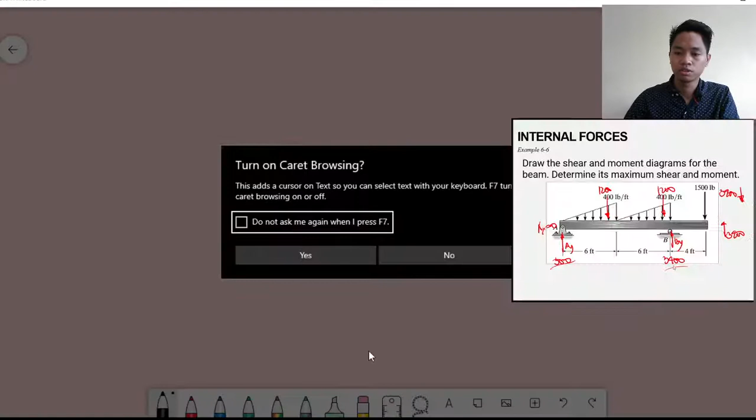Again, you can solve the reaction there so we can proceed to our shear and moment diagrams. Okay, so let's go here. So let's start with your load diagram. Let's always start with that - that should be your load diagram. So for your load diagram, we just need to

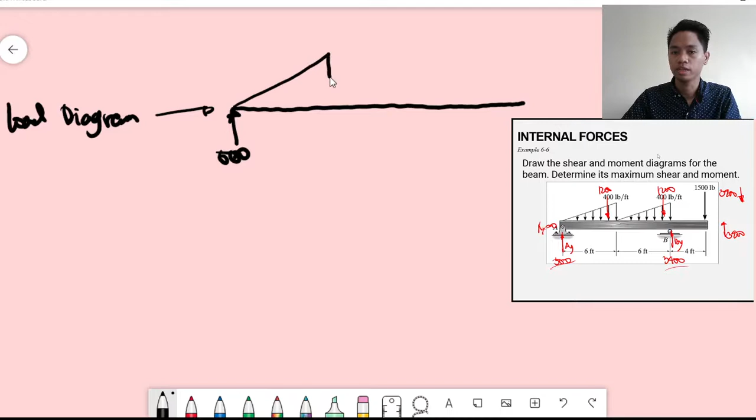state your forces acting. So let's identify the dimensions. We have your AY upward, that is 500, right. Then we have your triangular loading here with an intensity of 400 pounds per foot.

So the same, that should be the same length, 400 pounds per foot. Then after that, going up, 3,400. Okay, you start with the load diagram, then lastly it's drawn a bit extra to scale, then lastly there's a downward force of 1,500.

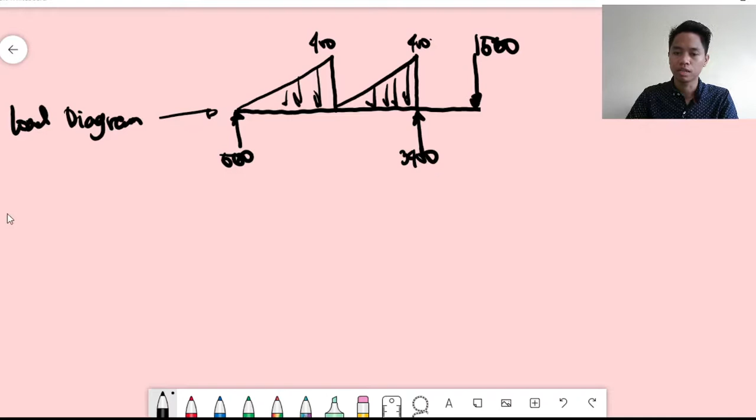Then after that, we need to solve and draw your shear diagram.

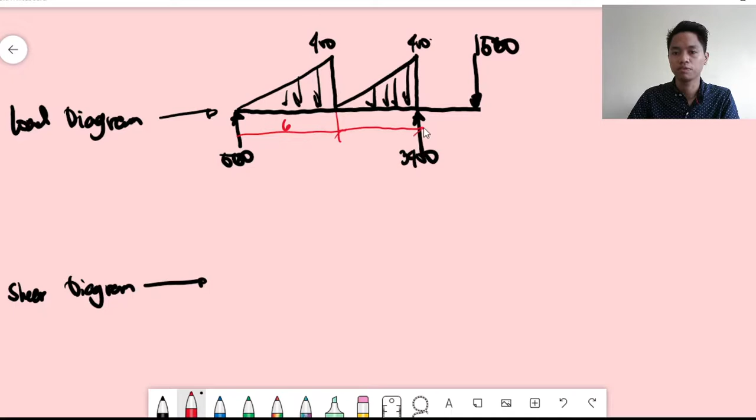So again, here's the technique to remember for drawing your shear moment diagram - there are only two things you need to remember. First, you know how to solve different areas.

You know the areas of different shapes, whatever shapes - parabolic, cubic. We already discussed before the different types of areas - triangle, rectangle, trapezoid.

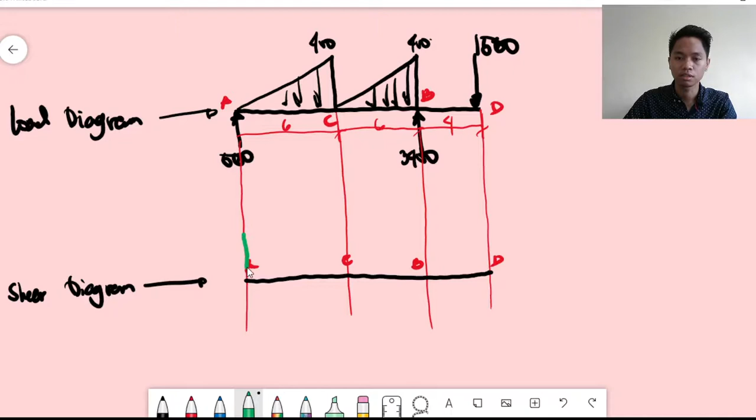So all upward forces are automatically placed on top. So at point A we have 500. That should be positive 500.

After that, since the change from A to C is gradual, you cannot go directly from A to B - there's no sudden change at point C, right?

So for the change to be gradual, you need to solve it segment by segment, from A to C, since that is where your distributed load is.

So we start with segment point C. Therefore, the shear at C is equal to the area of the loading from A to C plus the shear at A - that is our rule.

So therefore we need to solve the area of the loading diagram from A to C, then add the original shear at A.

This would be the change in shear, based on our definition - this is the delta shear.

So to solve the area is very simple - that is 1/2 of the base times height. The area is equal to 1/2 of the base, which is 6, times negative 400.

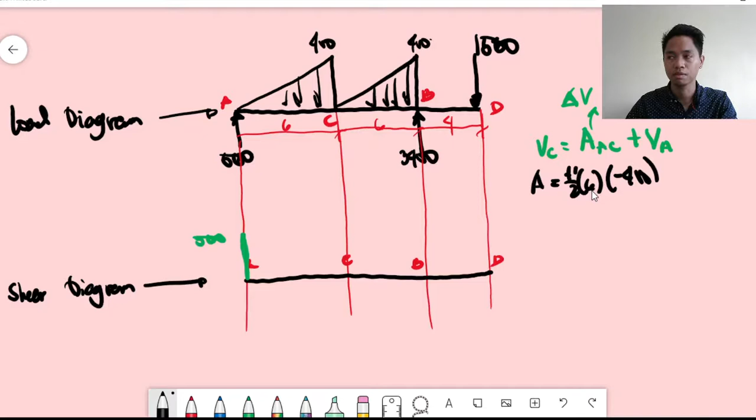So 1/2 of 6 is 3. 3 times negative 400 equals negative 1200. So therefore the area is negative 1200.

Plus the shear at A. What is the shear at A? That is 500. So negative 1200 plus 500 equals negative 700.

So it goes somewhere there - let me continue it. This should be negative 700.

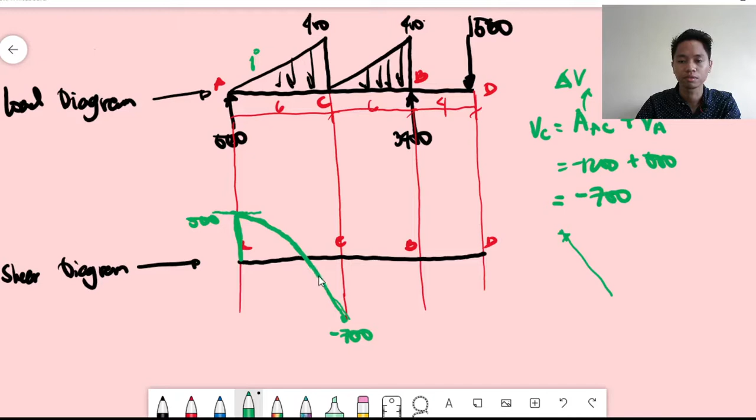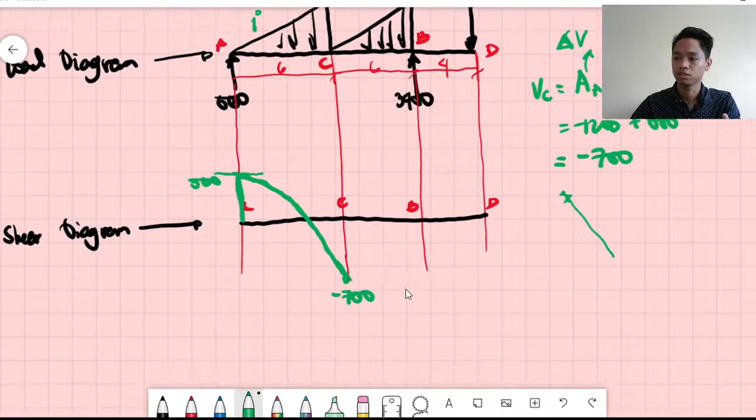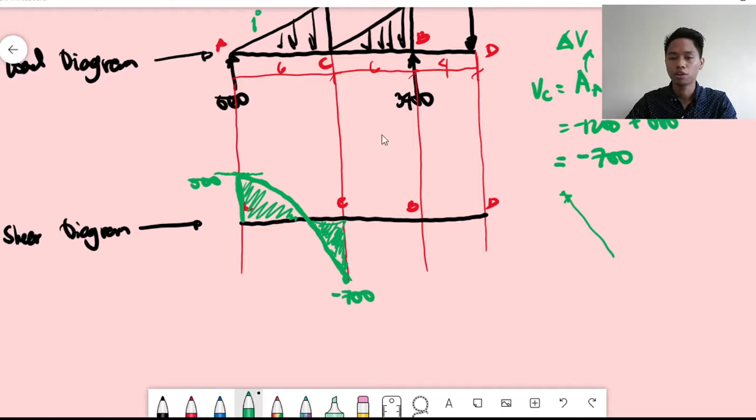So that's the shape of your load diagram, shear diagram. This is your shear diagram at this point—that's from segment A to C. So now, what is the shear at B?

What is the shear at B? Same as before, the shear at B is equal to the area—the area from C to B plus the shear at C. So what is the area from C to B? This is a different triangle, right?

A different triangle, this triangle here. Now what is the area of this? Same as before, the area is negative 1,200. So therefore that should be negative 1,200 plus the shear at C. The shear at C is negative 700.

So therefore, what is the shear at B? That is equal to negative 1,900. So it's somewhere there. If we project it down, that should be negative 1,900.

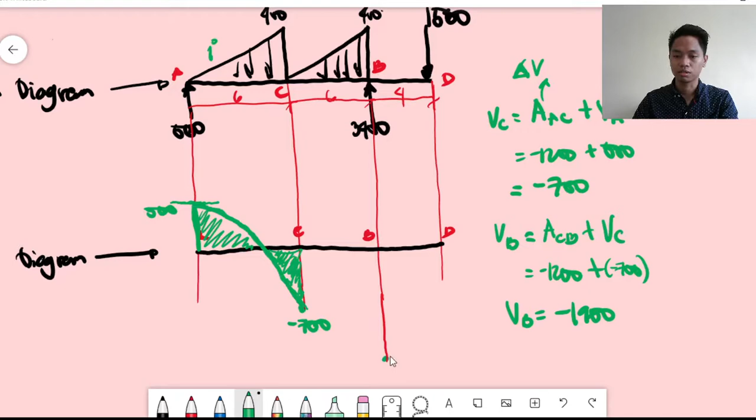So, same thing. Sir, how do we connect this? Same thing - the intensity at C should be the slope of your shear diagram. So you don't consider the negative 400. Okay, that segment is done, that's segment A to C.

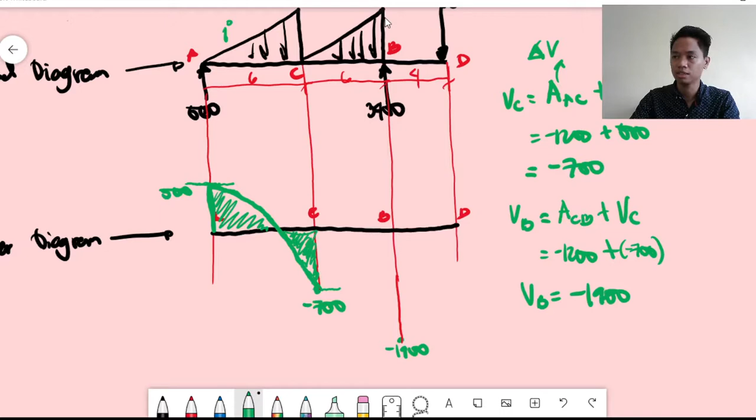Now let's move to the next segment, C to B. What is the intensity at point C of the second segment? Isn't it zero again? So therefore it's zero, horizontal. Then here, what is the intensity - that's negative 400, right? That's negative 400 again, so somewhere it continues there.

It's not very steep, but negative, meaning leaning to the left. So, tangent there, then tangent here. So it forms that shape - not quite a parabola, but just to emphasize the parabola shape. So that is your shear diagram from point C to B, somewhere like that, okay?

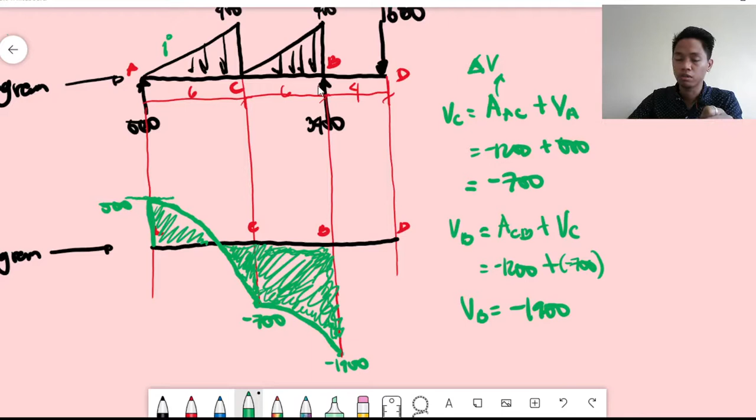So, therefore, what is the shear at B? Since we have 3,400, automatically, negative 19 plus the shear here. The load here - negative 19 plus 3,400. Why plus 3,400? Because that is an upward force, so it's positive. So negative 19 plus 3,400, how much is that? Negative 19 plus 3,400 equals positive 15.

So somewhere there, that is positive 15. So we connect it - from 19, it rises straight up to 15. So it's an abrupt change, from negative 19 it becomes 1,500 - that's because of the reaction there. So it suddenly rises.

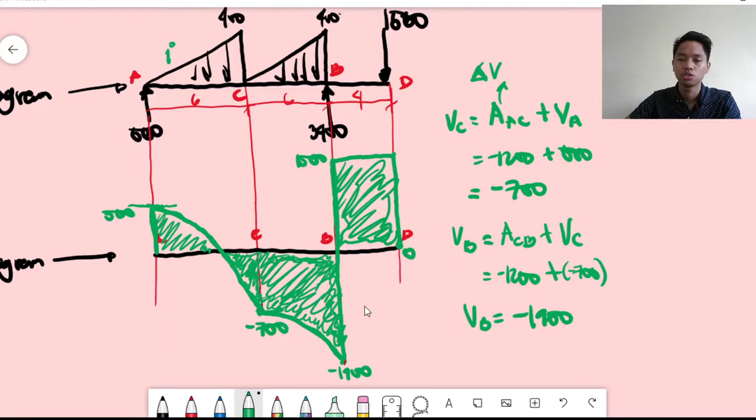Now we can solve what is your Vmax. Your maximum shear is equal to, obviously, negative 1,900 pounds. Okay, the color's wrong. Let me fix that. Okay, that is negative 19.

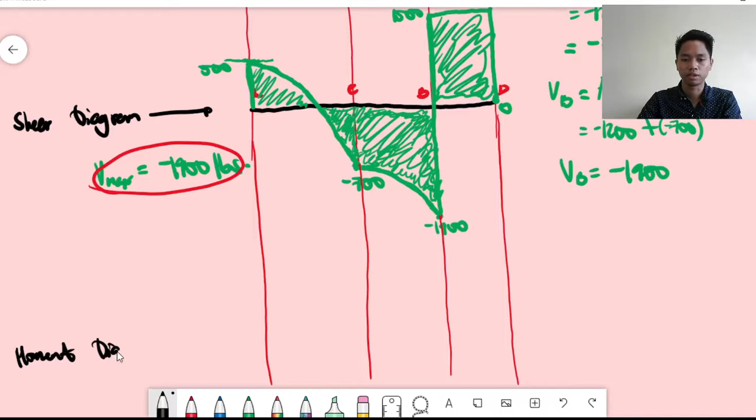So now, let's do the moment diagram. Moment diagram. So let's just project it. Okay, for solving your moment diagram. Let me draw this here. Okay, same as before - this should be our point A, our point C, our point B, and our point D.

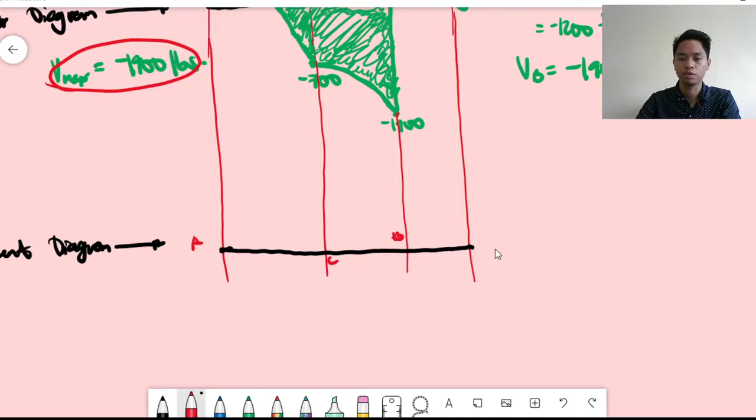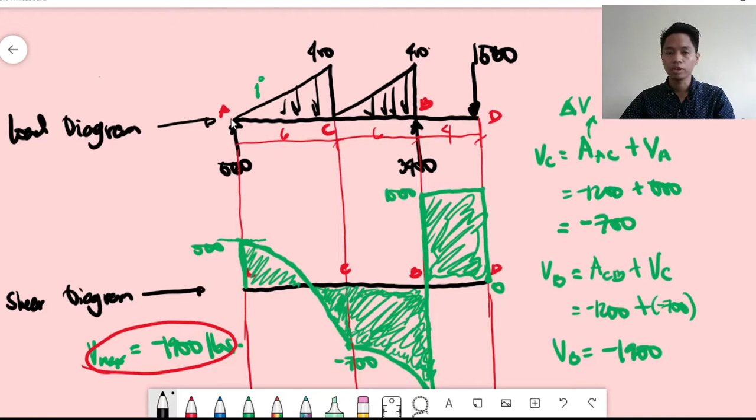Since we don't have any moments or couple moments in the load diagram, we don't have anything to reflect here. At point A, we don't have a moment or couple moment, right? So therefore, automatically, our first value here would be 0, since we have no moment or couple moment above. Alright? Then, what is the moment at C?

Okay, what is the moment at C? It won't go straight through, alright? It won't go straight because you have a sudden change in the shear diagram. When there's a change, you can't just go straight through - you need to account for it. So you need to segment it part by part, cutting at this part.

Let's call this point E. So you can't go straight through at point C, because again, there's a sudden change at E. So first we need to solve the moment at point E.

Now, what is the value at point A? What is the distance at point E? We don't know this distance yet. Let's make this our X. But okay, how do we solve for X?

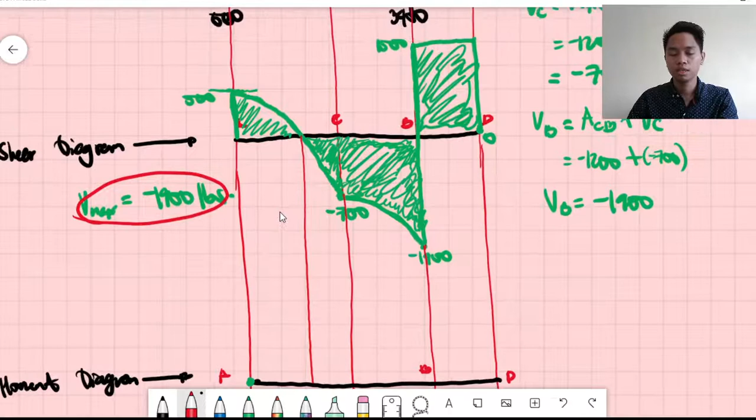So here's the idea - you know that at point E, the shear is equal to 0. You already know this because that's basic algebra - your x-intercept is where the value of y is 0.

So in this part, our y is actually the shear. So therefore, this would be our x-intercept, because our shear is 0 there. So what is the distance where zero shear occurs?

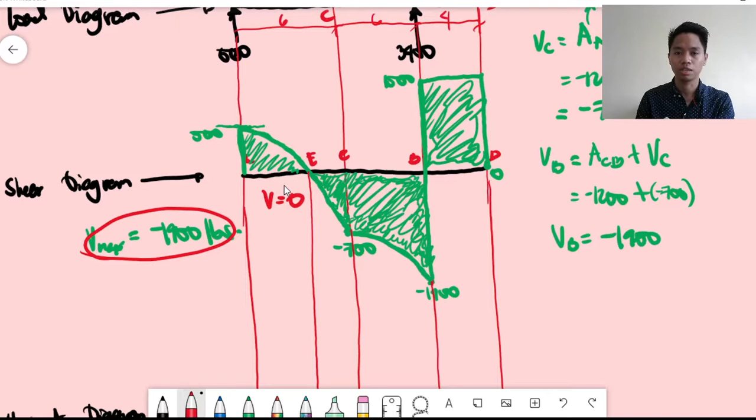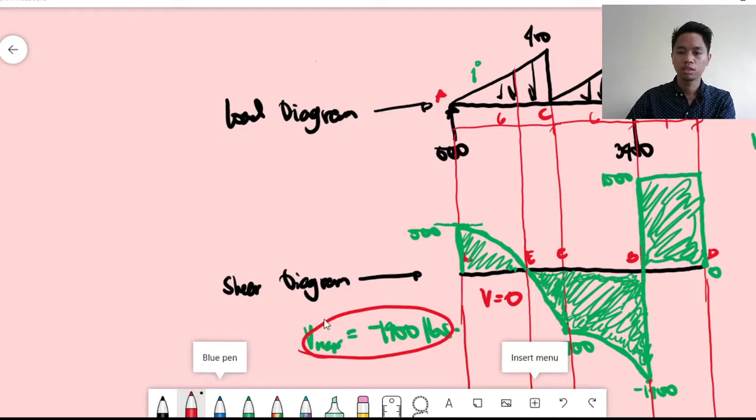Alright, so let's go back here. How do we get the distance x where zero shear occurs? Let's go back to our shear and moment diagram. Let's use this segment AE. Let's project it upward. This would be our point E.

Your shear at E is equal to the area - the area of your load diagram from A to E, plus the shear at A. That's our rule - the shear at E is simply the area of this load diagram, this rainbow-shaded part. So what is the area here? You need to add the shear at A to get the shear at E. That's basic, you'll master it along the way.

So what is the shear at E? This is equal to 0. You know it's 0, the shear at E. Now what is the area of AE? You know this is our x, so that's why we set it up this way.

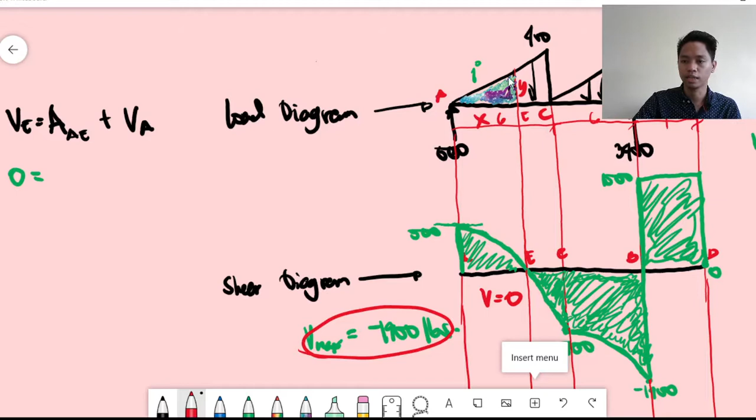So let's say this is our x and this is our y, the height. Let's express y in terms of x using ratio and proportion - this triangle over this triangle. Your x over y is equal to - the equivalent of x for the whole triangle is 6. It's ratio and proportion, 6. Then your y above is negative 400.

Negative 400 because that's a downward force. So therefore, what is the value of your y? Your y is equal to negative 400x over 6. So now we have the value of y.

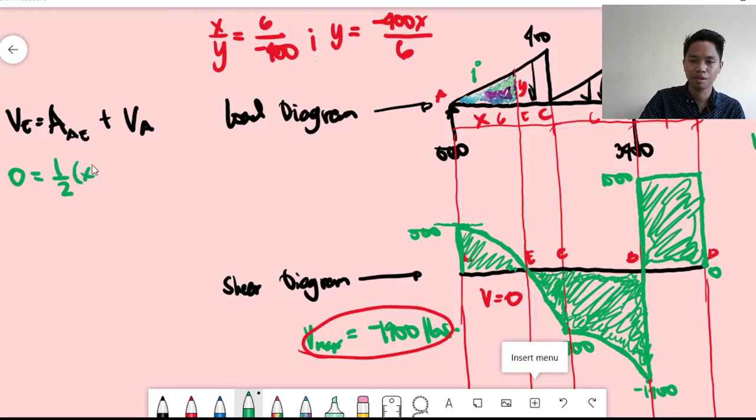Now, what is the area of this shaded region? The area here would be 1/2 of the base, which is x, times the height, which is y, that is negative 400x over 6. Plus, what is the shear at A? That is 500.

So therefore, this would be - let's calculate - negative 400 over 2 times 6, that is 12. So that is negative 100 over 3, x squared, plus 500.

So therefore, we can solve for x here. You can just use your calculator's mode 5, mode 5 3 - your mode 5 3, the coefficient of A is negative 100 divided by 3. B is 0, then our constant would be 500.

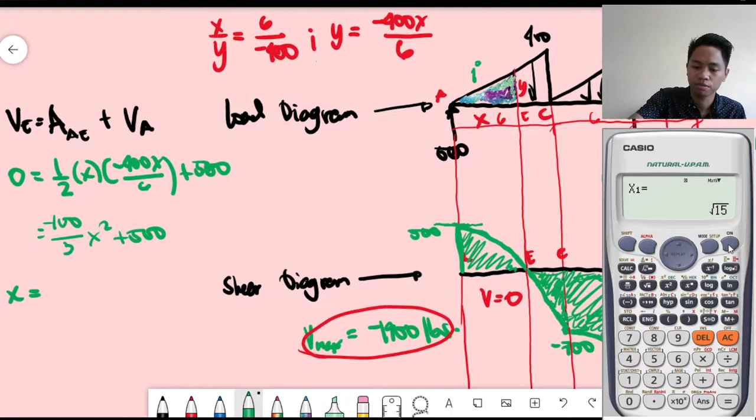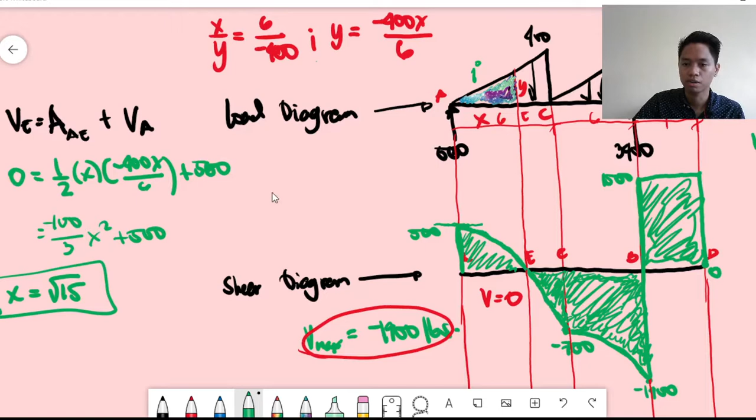Your x is square root of 15, and negative square root of 15. Obviously, we can't use negative square root of 15 because we don't have negative distance - it's a distance. So therefore, we have square root of 15 as our x. I hope you understood how we got x - it's square root of 15. Now, what is this remaining distance? This would be 6 minus square root of 15, obviously.

So, what is the value of x? Therefore, at square root of 15, what is the square root of 15? Mode 1, square root of 15, that is about 3. Yeah, 3.87. So from 3.8 feet, that's where your shear is 0.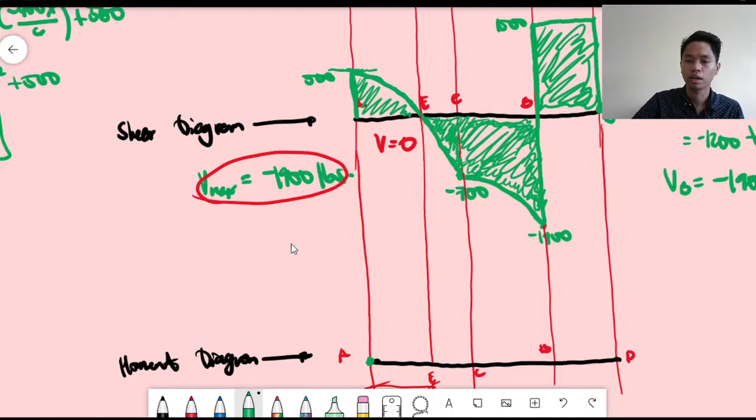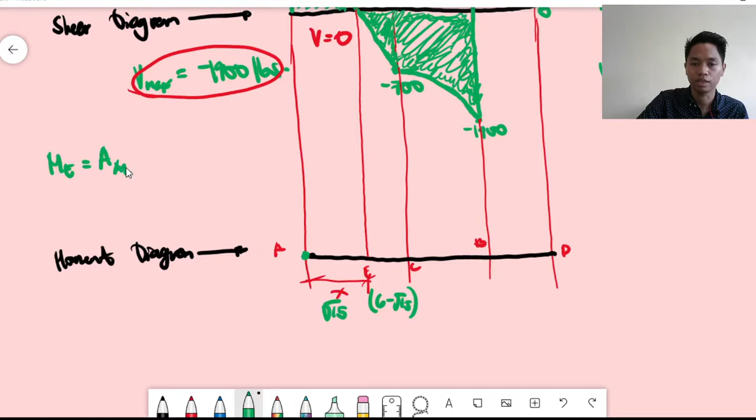So that is one important thing about the shear diagram. Okay, next, the moment at A, this is how we get the moment diagram. The moment at E is equal to the area of your shear diagram from A to E plus the moment at A.

Now, what is the area at A? This is the area, this area from A to E. So you need to master what the area is for different shapes or different sections. In this case, this is a parabolic segment, right?

Because we know this is to the second degree, so it's a parabolic segment. Now, what is the area of a parabolic segment? The area of a parabolic segment is 2/3 of base times height. I don't have to discuss that because it's a very common formula. It was derived using calculus.

So the area is 2/3 of base times height. In this case, what is the area of this shaded region above? That is equal to 2/3. The base is, what is this value? This is our base, that is equal to the square root of 15. The height, what is the height here? This is 500.

So therefore, what is our area? The area would be 2/3 of the base, which is square root of 15, and then the height would be 500. Our area would be 1,291 plus the moment at A, which is 0. So therefore, the moment at E is 1,291. So somewhere there, 1,291. Okay, so that's the moment at E.

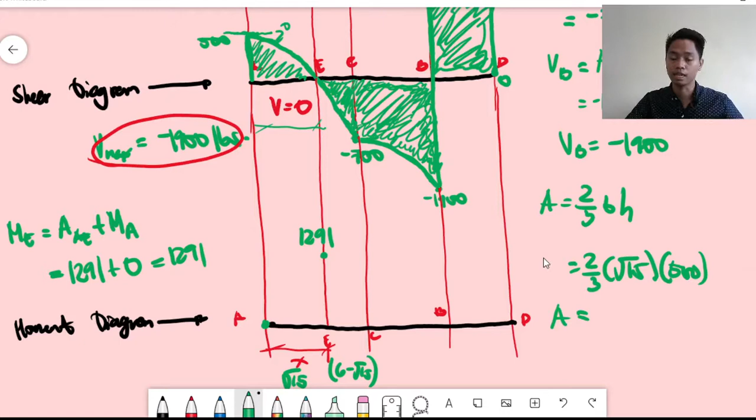Now the question is, where do I connect this? Very easy. Consider the intensity of the value of your shear, okay? The value of your shear, that would be the slope of your moment diagram. So what is the shear at A? The shear at A is positive 500, right?

That is positive 500, so that is leaning to the right. So somewhere there. What is the shear at E? That is 0, so therefore 0 slope. So tangent here, tangent at this point, that's how you connect it. So that's how you connect it.

So, one more thing to remember here. From point A, okay, consider segment AC. From A to C, E, which is in the middle of A and C, right? Point E is in the middle of A and C. Now, since E has 0 shear, if you compare the moment diagram from A to C, E will give you the maximum moment.

So that's one thing to remember, that wherever your 0 shear is, that's also where your maximum moment occurs. Not necessarily the maximum moment of the whole beam, but there's a probability that it's also the maximum, though not always. But in this case, if we consider segment AC, since it crosses the beam at the x-axis, that's where the 0 shear is. So if we compare from A to C, E has the biggest moment. It's the maximum moment in that part.

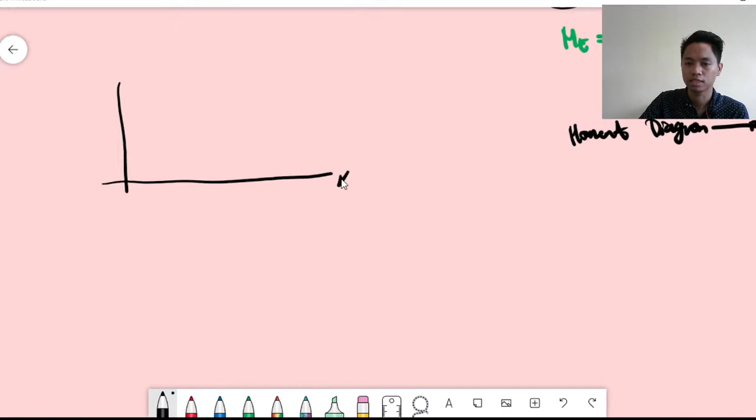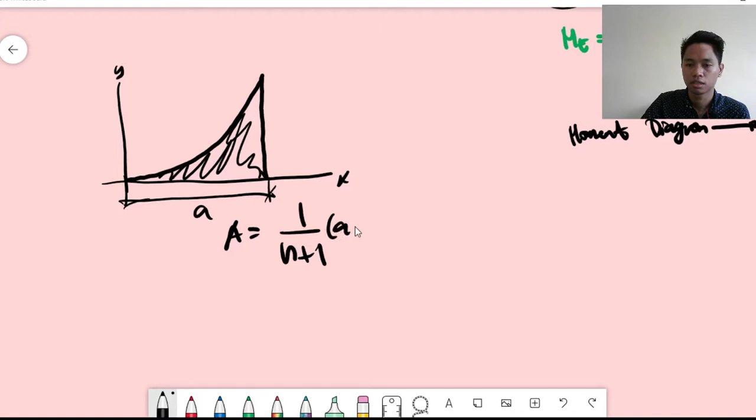So please be careful, you can't just use that formula. Why, sir? Because you can only use that formula if your vertex is at the origin. Or, to simplify, you can only use it if your slope at this point is 0. Meaning, if this is your x-axis, this is your y-axis, that formula derived for the spandrel, this is your spandrel, has an area equal to 1 over n plus 1, with this as your A, and this would be your h, or your height.

So this would be AH over n plus 1. So therefore, if you have a parabolic na spandrel, that should be 1/3 of AH, diba? Kay 2 plus 1 raman ta. Pero dili ito nimo siya pwede magamit sa ato problem dire.

Kay ang point E is not a zero slope. Okay, dili siya zero slope ko naman. If you are going to consider ang value nimo dire, dili ni siya zero because whatever the slope here is equivalent to the intensity here, di ba? That is the explanation.

Kung unsay slope nimo dire, that is equivalent to your intensity here. So therefore, sure ka nga dili gyud zero ang slope ani niya. So therefore, dili nimo pwede magamit ang kaninga formula kay your vertex nag-ana man ni ang graph sa atong problema. This is our point A, this is our point C. Dili niyo pwede magamit because again, dili ni siya zero slope.

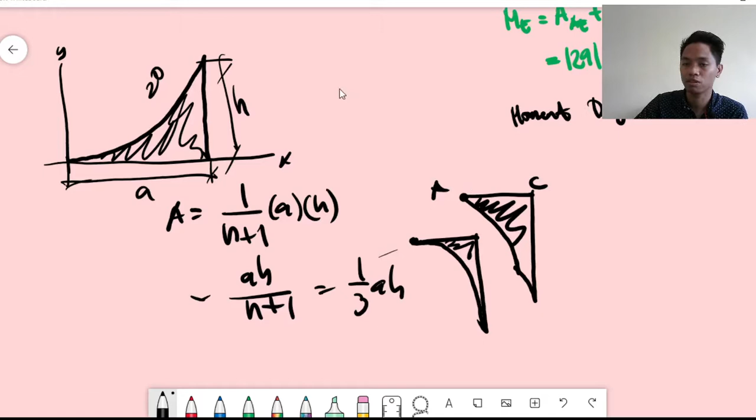Okay, dili siya zero slope. Unlike kung nakaana na siya, nakatangent siya diha, pwede niyo magamit si 1/3 AH, kay zero slope man siya diha. Pero dire, dili na zero slope. Kaya based sa imuhang figure kaganina, makabalo ka nga dili ni siya zero slope. Kaya again, dili man ni siya zero, kaninga point. So, whatever the value here, that should be the slope here.

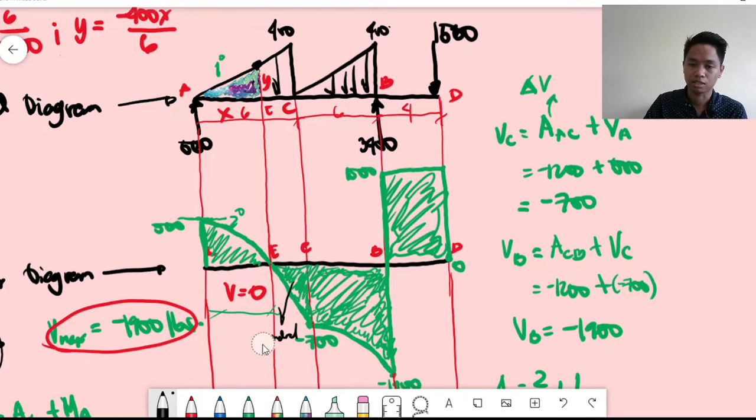So, therefore, dili niyo pwede magamit si spandrel in this case. So, unsa ko pag-solve si area at this problem, kay malangan man ka. Okay, nga rin na masulod ang imuhang diskarte. Diskarte lang na siya. So, maski unsa nga buhaton, diskarte lang gyud ka kung unsa nimo pag-solve si area. Okay, how to solve this area?

Di ba kabalo ani? Ang buhaton nato karon diri is, di ba kabalo man ta the area of this one? We know the area of this one.

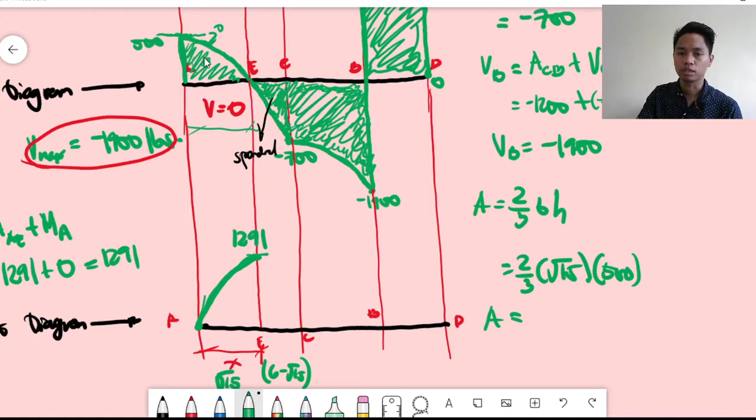We know the area of this one, kani siya. Di ba? So our problem here is, ano natin siya pag-solve kaning area kaning akong naay nakabutang nga spandrel. Pero we cannot use the formula katong 1/3 BH kay this is not sa vertex, wala siya sa origin. So we can just solve this area if...

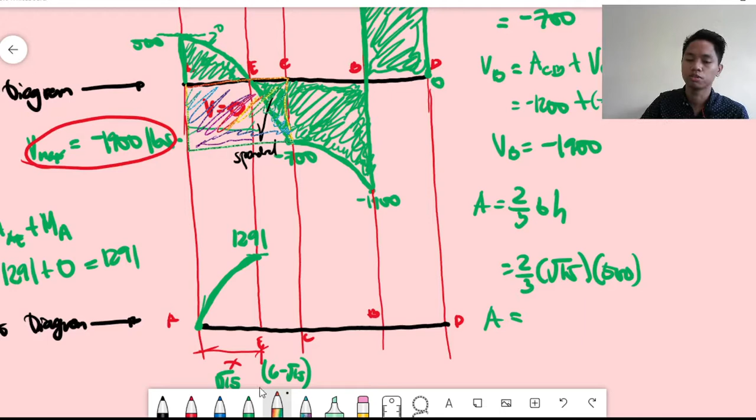Di ba pwede niya ito gamitin nga rectangle? So natay rectangle diri. 'Di ba if you are just going to observe lang. Kani nga area, say this is our A1. Tapos ang atong A2 would be ang rectangle.

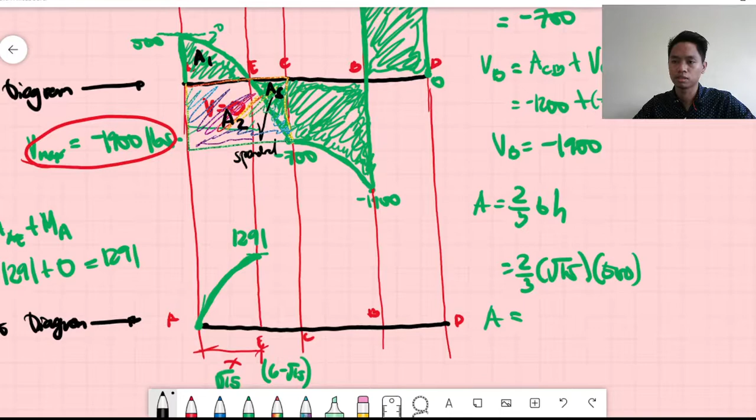So, the area, say this is our spandrel. Ato siya butang AS. The area of AS, siguro ako na siya i-delete kay para natay space. Your AS would be area 1 plus area 2. Okay, I hope mo nakagets.

Ang A1 nato is kani siya, kaning green. Ang atong A2 is kaning naka-rainbow. Minus. Unsay ako i-minus? Di ba I can solve this area of this parabolic nga segment? Kaya na nako siya i-solve ang parabolic segment gamit ang formula, the area is 2/3 BH. Mura na siya, kung giyon sa nako pag-solve si A1, naka-solve dara kaning si 1291, di ba? Kung giyon sa nako pag-solve si 1291, kani siya, kung giunsa nina ko siya pag-solve, that would just be the same.

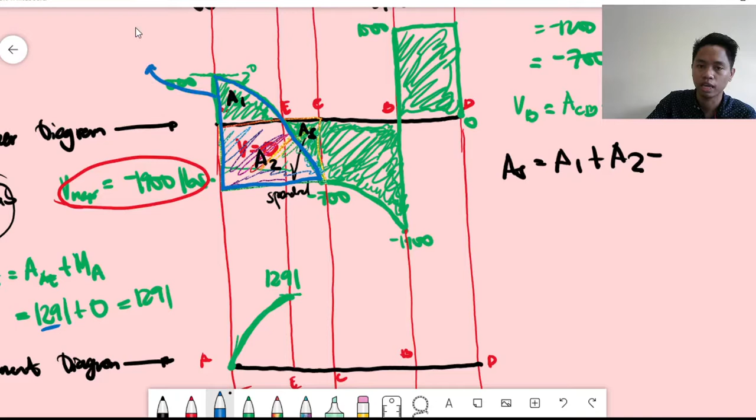Okay, say ang atong area sa dako would be your A parabola, AP. That should be A1 plus A2 minus area of your parabola. Kaning green plus kaning rectangle nga rainbow. Ako nitang tangon ang kaning parabola nga dako. Di ba ang mahabilin kay si AS?

So ang mo na i-discard ang imo lang jud puhunan. Ang imo lang jud puhunan diha is dapat swito jud ka sa mga different areas, mangita jud paagi nga makasolve ko sa areas. Ang imo lang jud diri is dapat makasolve kag area. Mura na problema nimo, so discarding na lang din na siya.

So AS would be what is the area of your A1? Na-solve na to, the area of the A1 is 1291. What is A2? How to solve A2? Di ba rectangle naman na siya? Rectangle that has width of 6, yeah. So this should be 6 multiplied by 700.

Sir, wala lagi nimo gamita ang negative. Wala ako na gamita because again, I'm just considering the value of your area. Wala man negative nga area. So again, ako na siya i-consider as area gyud, wala ako nag-consider sa sign. Just plain area because again, that's the problem natong solvehon karon.

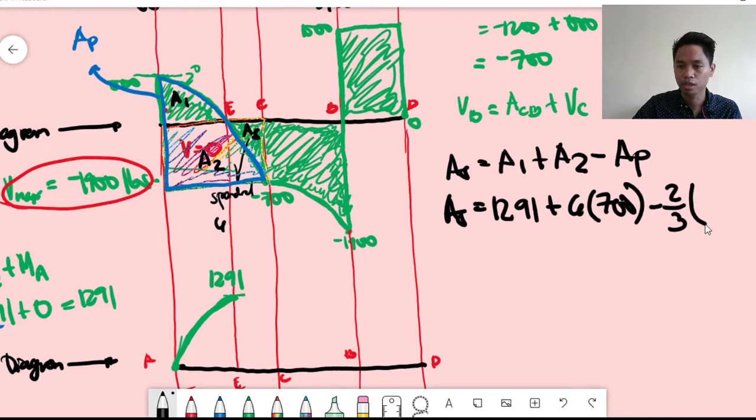Unsa ang pag-solve sa area AS? So 6 times 700, that is equal to your rectangle. So minus, okay, i-minus nako ang dako kaayo nga parabolic segment. That should be 2/3. What is the base of this parabolic segment? The base is 6. And the height is pila ni distance diri?

Gikan diri padung diri, that should be 500 plus 700. So pila na siya? 1,200. Therefore, what is the area of this very small nga spandrel? That is 1,291 plus 6 times 700, minus 2/3 of the base, which is 6. The height is 1,200. That is equal to 691. Okay? Therefore, the area here would be 691.

Alright, so dinhi ako ibutang si negative. Sir, ingat ka nang magbutang og negative. Sure man ko nga negative area ni siya, kay naa man siya sa ubos, di ba? Your AS is a negative area. Kaya naa siya sa ilalom sa x-axis. So, therefore, naa diri si negative 691.

Alright, so therefore, we can now solve the moment at C. The moment at C is equal to the area from E to C, di ba? The area from E to C plus the moment at E. Therefore, the area from A to C, from E to C, kana siya. That is our AS, negative 691. Di ba? That is the area.

Plus, what is the moment at E? That is 1,291. Therefore, what is the moment at C? That is 1,291 minus 691. That is equal to 600. Okay, so therefore, this would be 600.

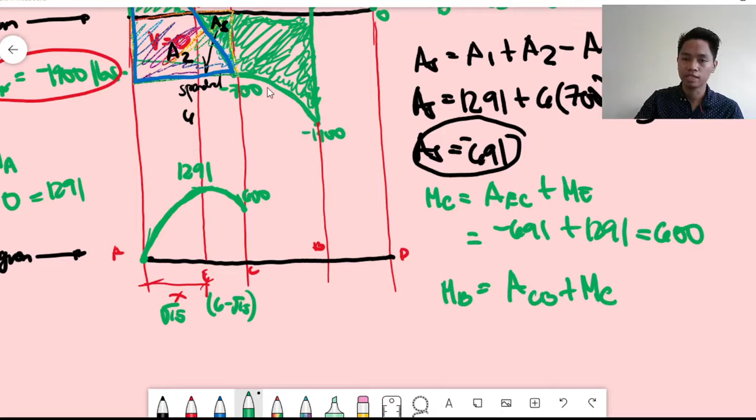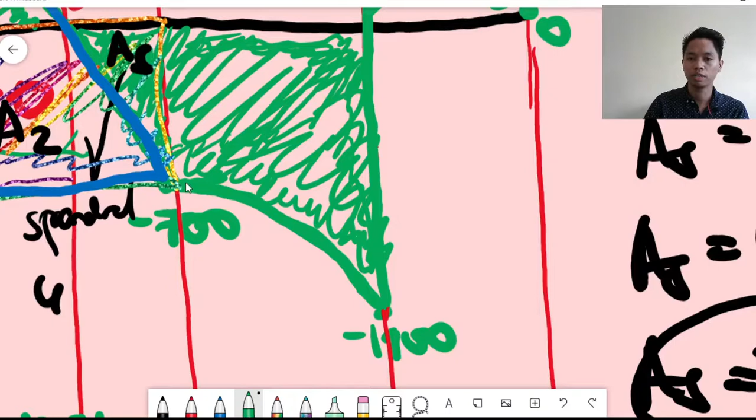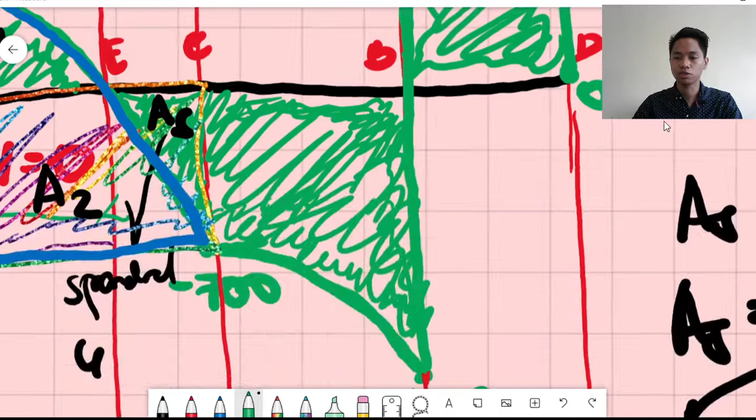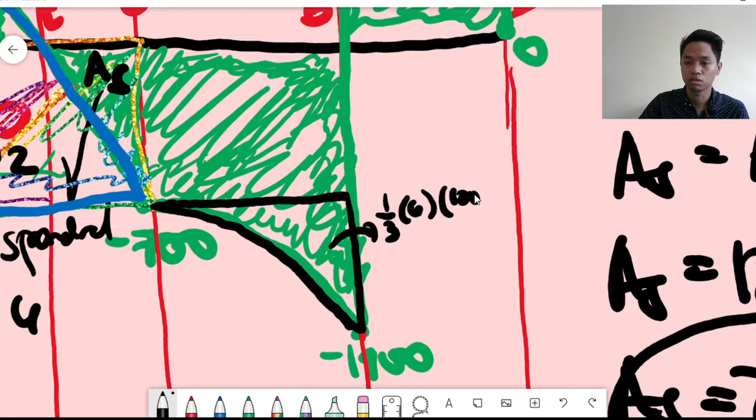Okay, what is the area of this spandrel? This is 1/3 of the base, which is 6. The height is, pilay height nato diri. If this is 19 and this is 700, pilay ni siya. 19 minus 700, that is 1,200. Okay, the height is 1,200. Therefore, what is the area of this spandrel, a very small spandrel? Kana siya. That is 1/3 of 6 times 1,200. This is equal to 2,400. So 24 na siya.

Then, we can also solve this area. Very easy na lang siya. Area na siya, pila ang area na? That is 6 ni siya. And the height is 700. So therefore, the area is equal to 700 times 6, which is equal to 700 times 6, that is equal to 4,200.

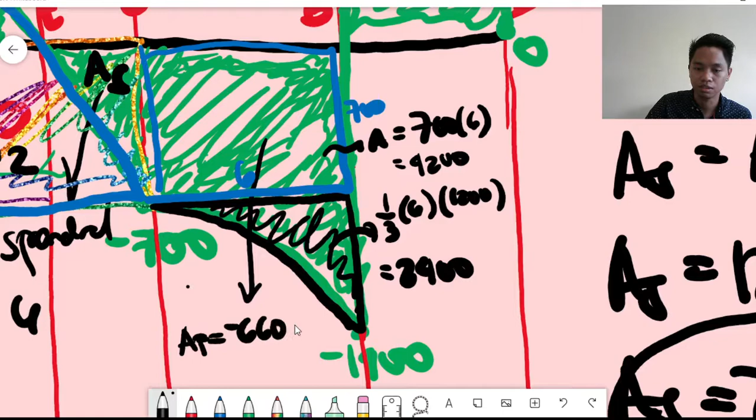Therefore, what is the total area? Okay, the total area, or AP, ako nang siya ibutang AP. The total area is 24 plus 42, that is equal to 66. So, 66, that is negative 66. Because again, if ato na siya i-zoom out, okay.

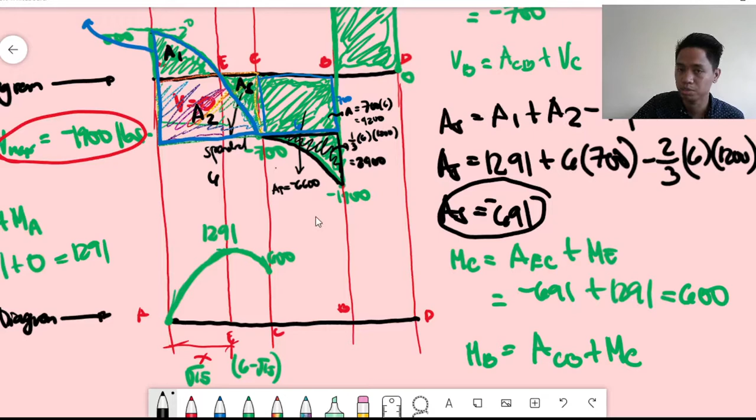The moment at C is 600. Therefore, what is the moment at B? That is negative 6,000, so somewhere there maybe. So sir, where do I connect this? The same again, what is the slope here? That is negative 700, so negative, sloping downward. Then the slope here, what is it? 19, so it's also sloping.

So therefore, when we connect this, tangent there, then tangent here too. So what is that? If this is second degree, right? This one is second degree. So therefore this would be a third degree, a cubic graph.

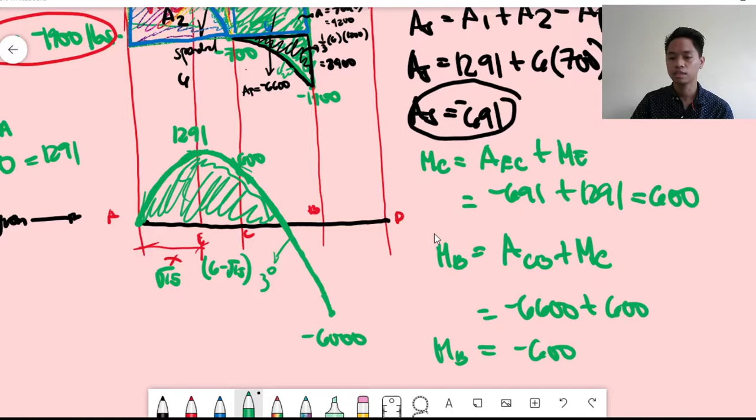So it's a bit long - this is our moment diagram. Alright, so what is the moment at D? The moment at D would be the area - the area from B to D plus the moment at B.

So very easy, what is the area of BD in the shear diagram? What would that area be? Very easy, that is 1,500 multiplied by 6 - ah, 4, this one is 4. That equals 6,000, positive 6,000 since it's above.

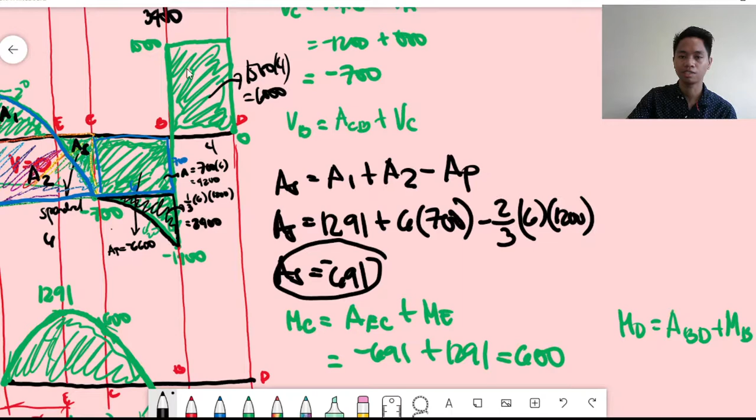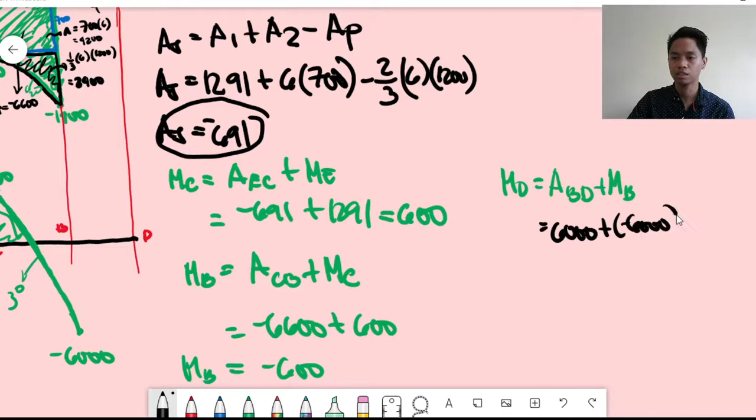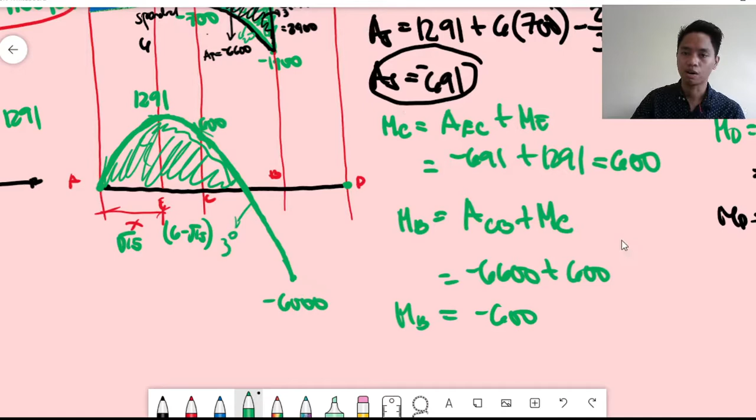So therefore, what is the moment at D? That is positive 6,000. What is the moment at B? Negative 6,000. So therefore, the moment at D equals 0. So therefore it will really go back to D, which is 0. Now, how are we going to connect this graph?

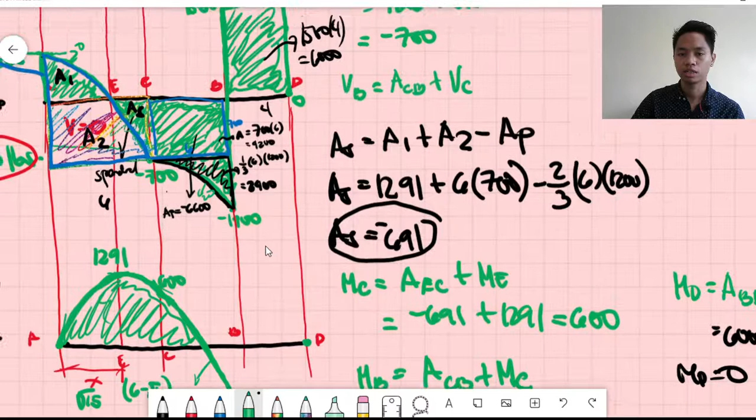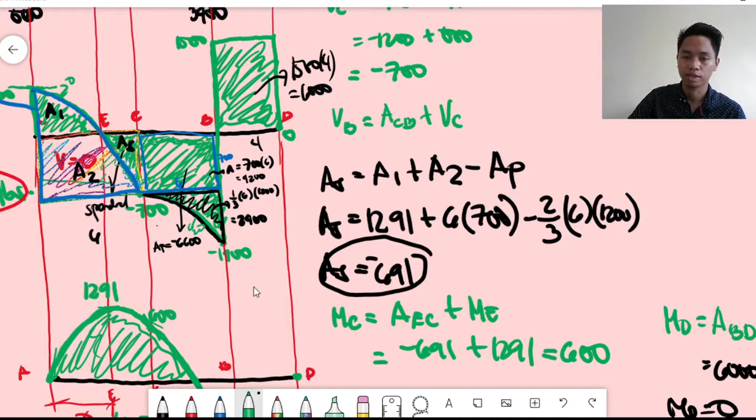The same again, what is the value at B? This is B, what is the value of B? The slope is positive 1.5. I didn't use the 1.9 here since that's on the other side - that side is above, so that's why it's a sudden change, 1.5. So positive 1.5, sloping to the left, sloping to the right.

Okay, that's it, let's just connect it. Then what is the shear at D? Obviously the shear at D is 0, so horizontal. Okay, so therefore this is our moment diagram.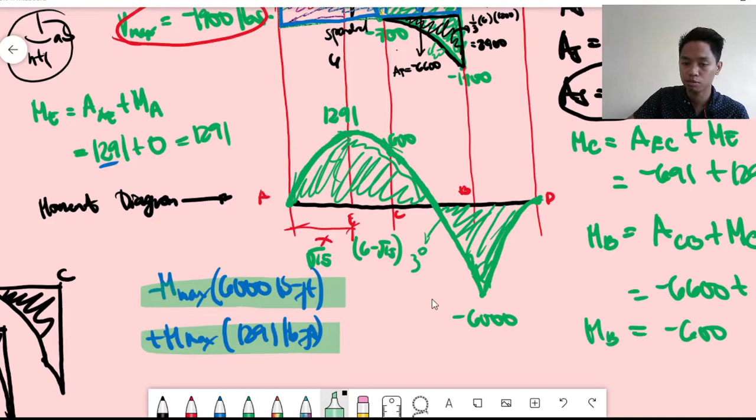And now we can determine the maximum moment. The maximum moment - we have two moments there, the positive moment and the negative moment. So what is the maximum negative? The negative maximum moment is negative 6,000 pound-feet. Then the maximum positive moment is equal to 1291 pound-feet. So therefore these are the maximum moments - we have a negative maximum and a positive maximum, both of which we need.

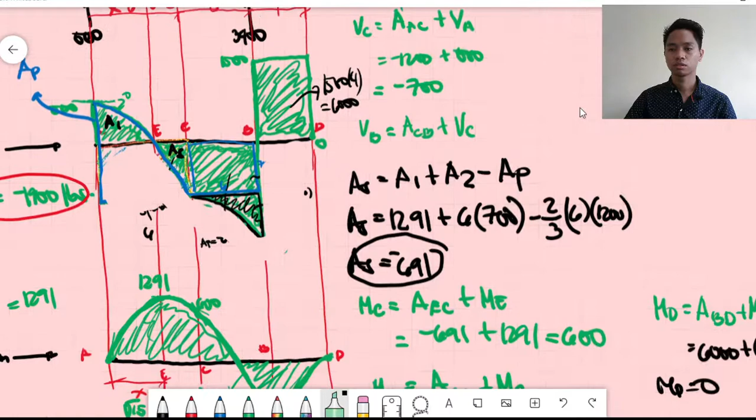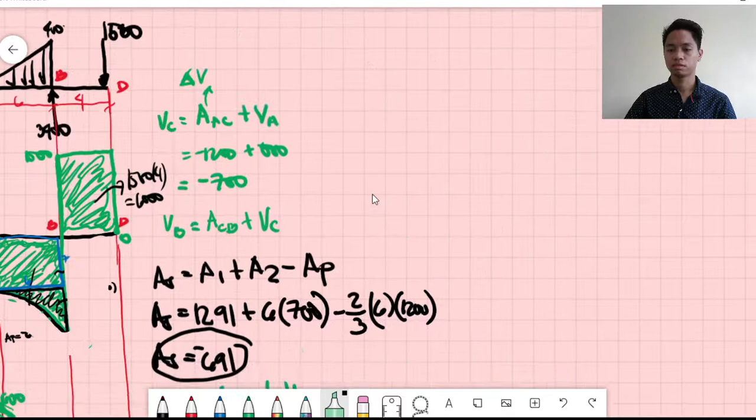Oops, let me fix this shape. Can everyone see all of it? Okay, so that is our load diagram, our shear diagram, and our moment diagram.

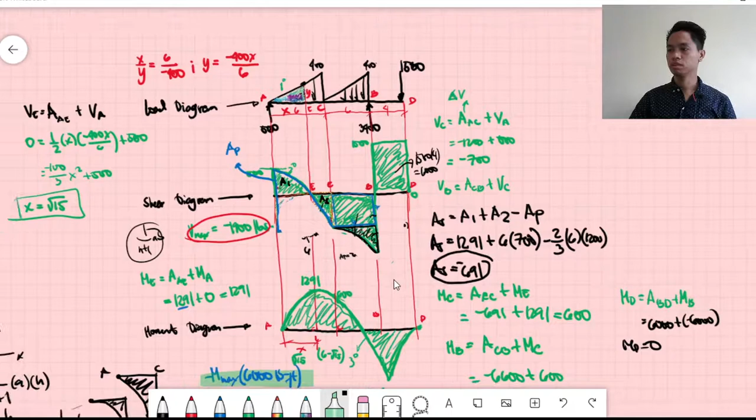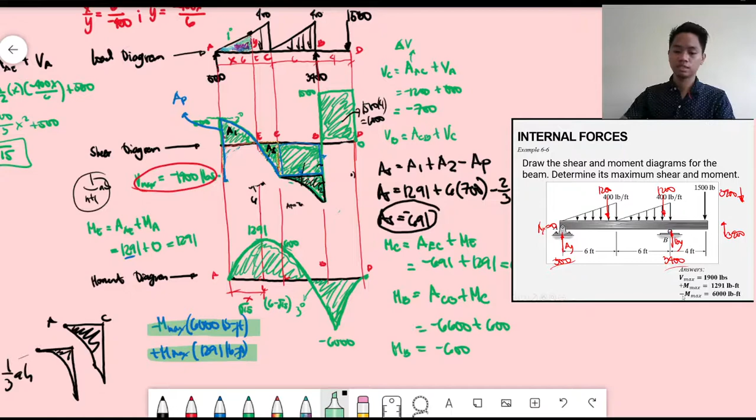Okay, I hope that's clear. Now let's check if our answers are correct - our answers are correct. So what is our maximum shear? That is negative 1900 - sorry, that should be negative 19. Alright, that should be negative 1900. Then the maximum positive moment is 1291, and the maximum negative moment is 6,000 pound-feet. Okay, so that is our second to the last example.

So let me just delete this. Okay, remove. Okay, so that's how we solve it - that's how we're going to solve for the moments and draw the shear and moment diagrams. Okay, I hope that's clear.

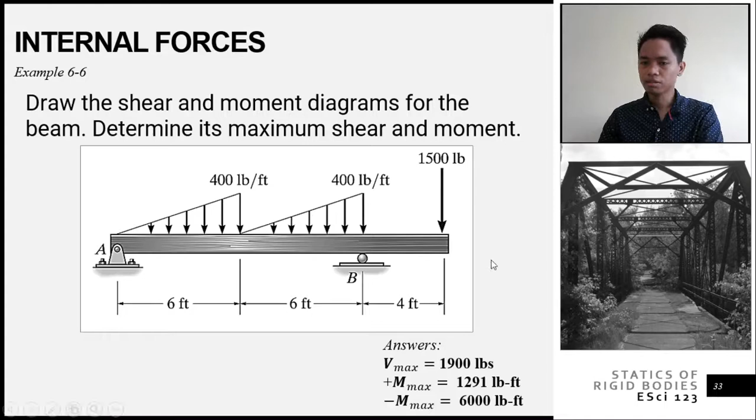Let's proceed to the second equation. Okay, so this is a prop beam with internal hinge. So what time is it now? Almost 1 hour already. Okay, so I'll just be posting a separate video for this one since the video would be quite long if I solve this now. So I'm just going to end my video here and upload another video for this example.